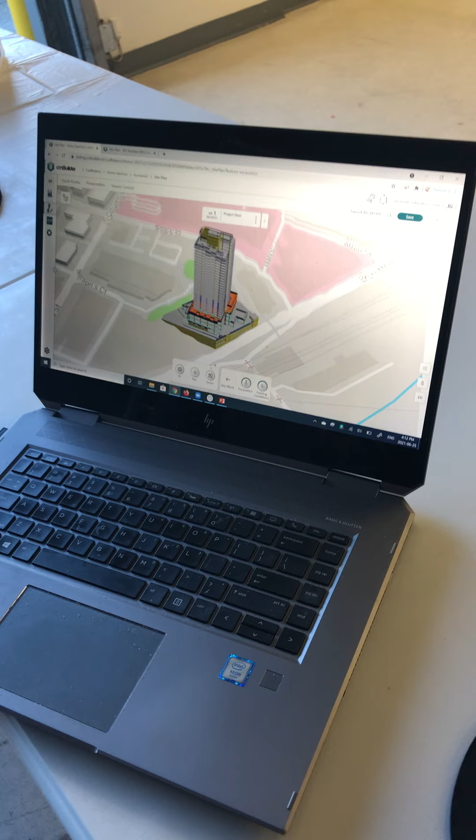I'm going to start by showing two major improvements we made this week. First, I've entered an address, and I'm 100% on the web, 100% browser-based. I've snapped into my BIM model on this very complicated site.

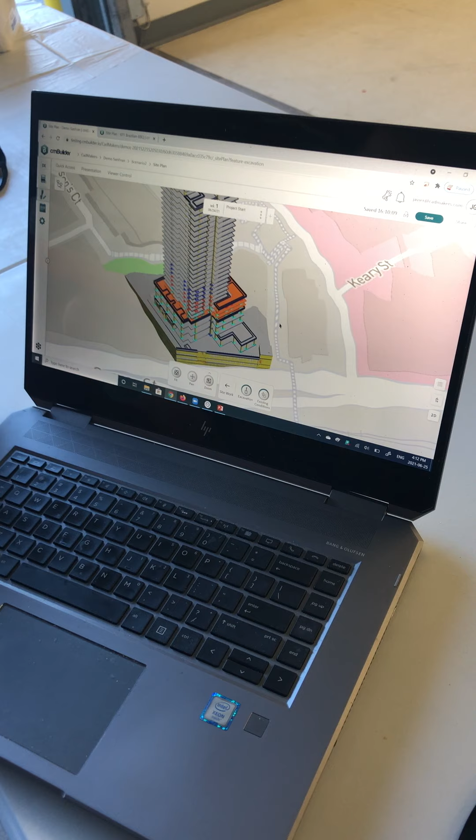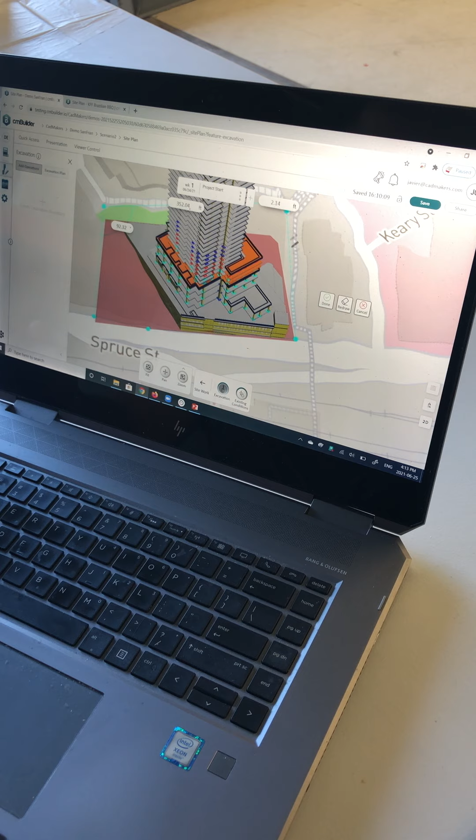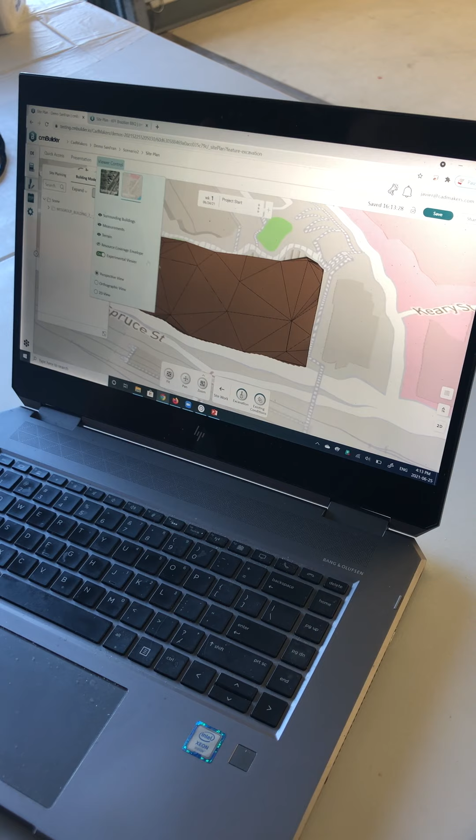The first thing I want to do is create an excavation boundary. So I'm just going to sketch over the map an excavation boundary from here to here. Okay, and now what's going to happen after I accept is I'm taking that static map we use to start the product off with, and I'm going to replace it with my new terrain.

Terrain, hide. So now we've created our own new dynamic 3D model of the extrapolated points, basically creating a new top surface that's highly accurate. So I'm going to turn back on the terrain, and start thinking about how I would make my first cuts.

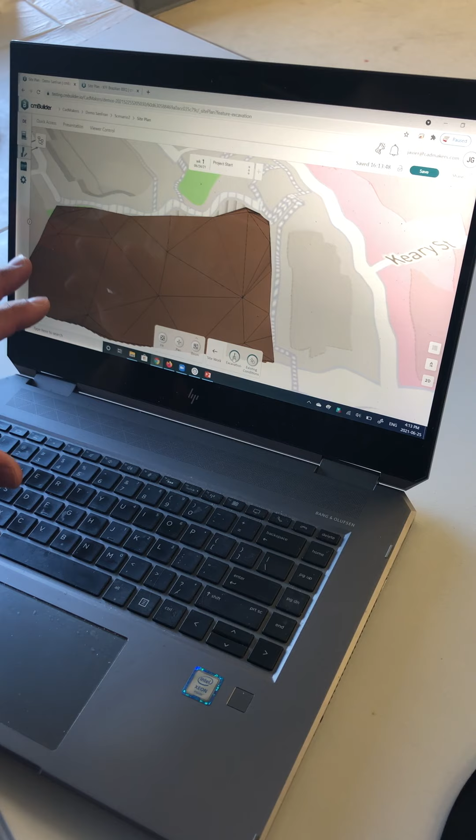If I go back into excavation, we showed this a couple weeks ago, now I can start drawing directly in my browser, directly on the web. I can just start making a cut. Let's make the first cut here, and boom, you get a nice look at the details here.

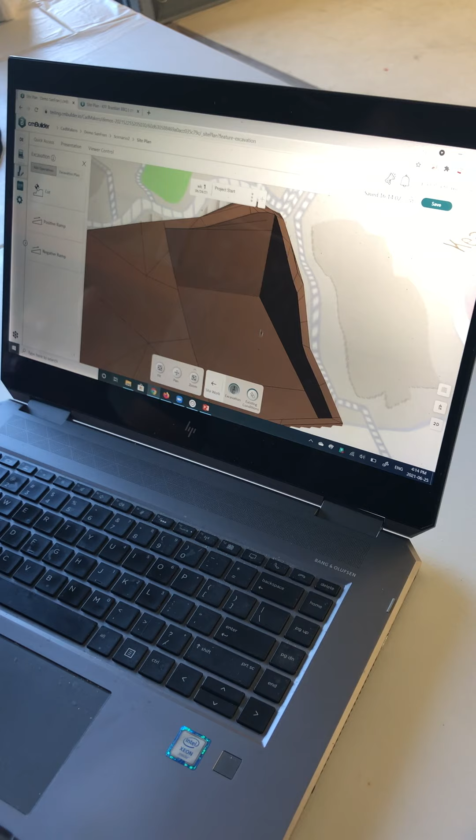We were going to show some stuff on shoring and different types of plans. We'll do that in a future Key Feature Friday. But one thing's really nice here on a very difficult site like this, I could just click a button and add a swell factor, and I got my compact volume of the takeoff. It was just a matter of a couple clicks, and I have a nice takeoff.

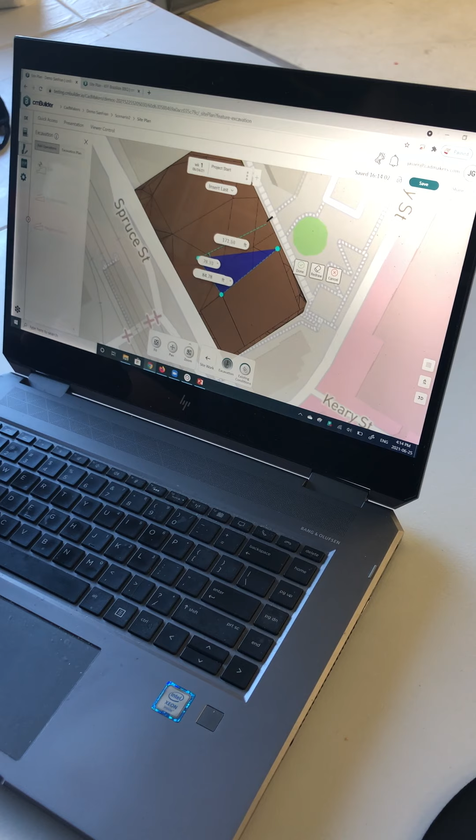If I want to do that again, I'll go back to add operations, add another cut. Let's put it in 2D mode this time and cut from here to here. Let's say we were phasing this and we're going to put a ramp. And there you go, so you get the idea. You can start doing different types of 2D and 3D elevations directly in the web.

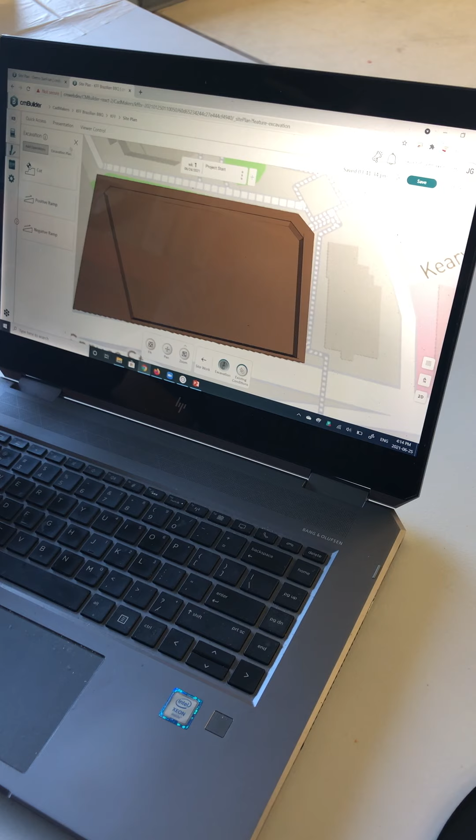Now, the next thing I want to talk about that we added today is really exciting. If I'm doing these cuts, I can go in here and edit this cut detail. Let's say this boundary has a slope, so I want to go say 3 to 4, or say 4 to 5. In real time, you're getting a different angle on that slope.

If I wanted to do that again, I can just go edit, and go back to a more traditional 3 to 4 slope wall. Now if I wanted to actually start cutting out some of my excavations, I can just go ahead and add another operation.

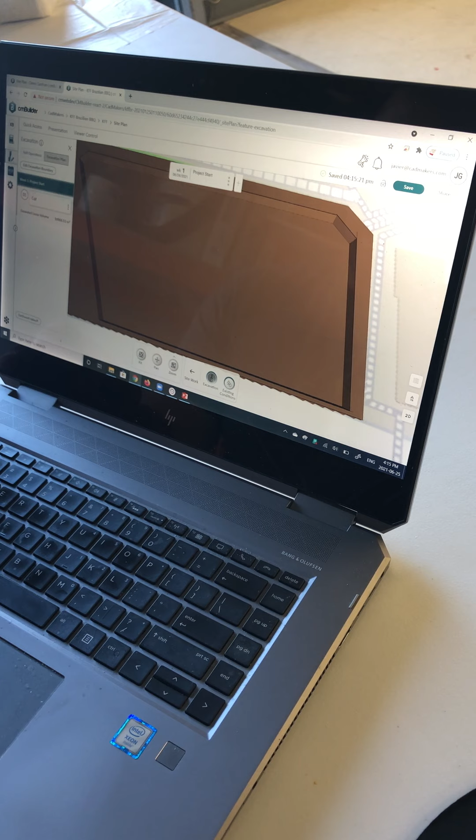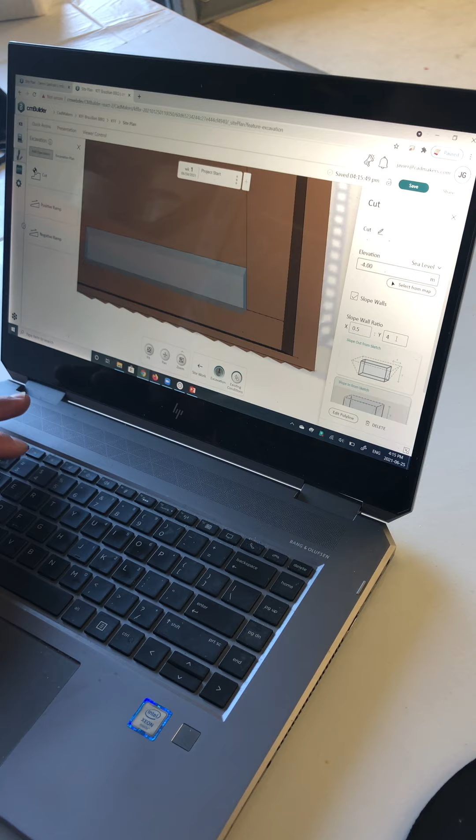Let's pretend we're putting a strip footing here or something. So if I want to draw a strip footing, I need to do detailed excavation for my strip footings. I'll click that, and as you can see, I can now go, okay, what if I'm 1.5 or 0.5, so 0.5 to 1, let's say. So 0.5 to 1, or 0.5 to 2. You're basically in real time doing all your slope wall analysis.

1.5 to 1, and you can see it's instantly updating on the map your detailed excavation. Then you can overlay your model back in there and get really accurate details on the, so if I go in here, I can see the earthwork takeoff of this cut based on this. This is the strip footing cut versus the bulk excavation.

So, sloped walls and the algorithm to smooth the top of a highly difficult terrain here, and then get good data to make good decisions.

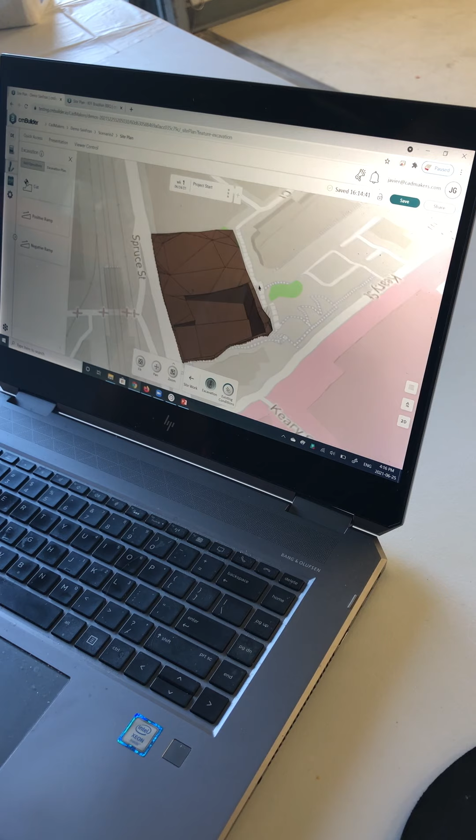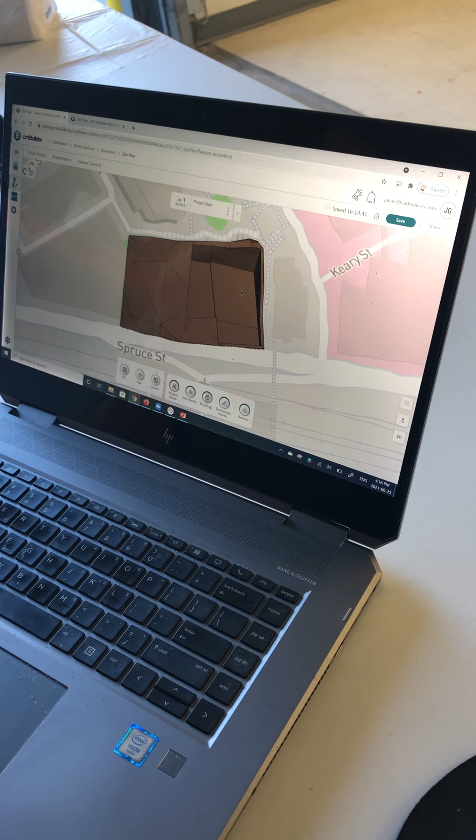Now, of course, you can drop in all your equipment like pile driving machines, all from the catalog inside cmBuilder, and do a 4D sequence of this. But today I was just focusing on how easy it is to model and do excavation planning directly on the web, and now do detailed excavation with cmBuilder.